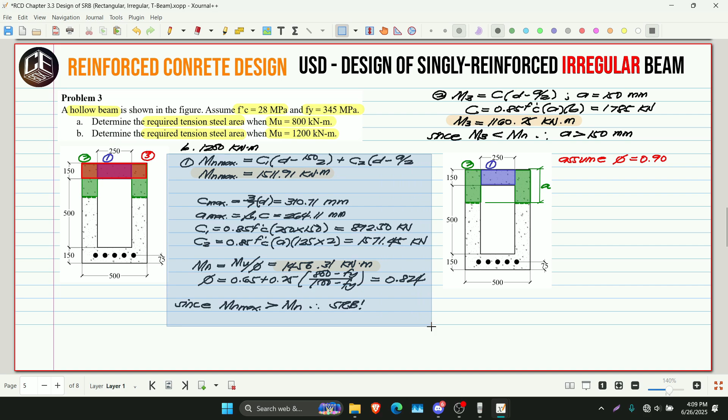So, anong equation natin para sa MU? Ang ating MU is equivalent to phi. Then, multiplied by C1. Ito yung area 1 natin, no? So, C1, then multiplied by, ano yung kanyang moment arm? D minus 150 divided by 2. Yes, divided by 2. Then, plus C2, multiplied by D minus A over 2.

So, ano bang equation ng C1? 0.85 F prime C multiplied by A multiplied by 250. So, ito, familiar na sa inyo to. Ito yun, di ba? Ito, 892.50. Then, ang atin namang C2 is equivalent to 0.85 F prime C multiplied by A. Ito yung A. Then, multiplied by 125.

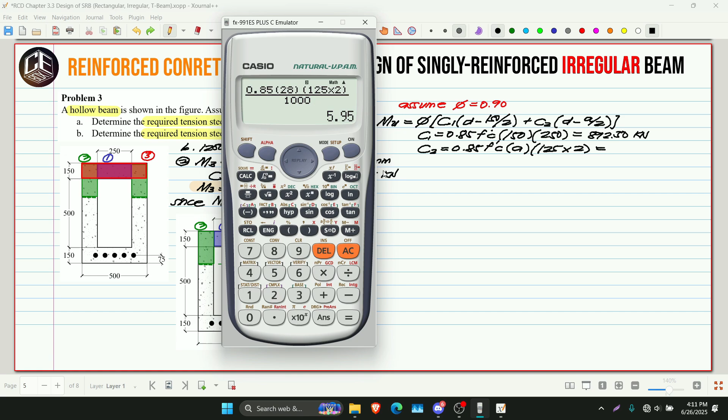Sorry, hindi to A, no? Sorry, this is 150 pala. Ayan. So, this is 150. So, this is 125 multiplied by 2, kasi dalawang area. So, simplify na lang natin. So, 0.85 times F prime C multiplied by 125 times 2. Then, divided by 1,000. 5.95 multiplied by A.

Okay. So, ngayon, yung ating MU, i-divide natin ng 0.90. So, 1200 divided by 0.90. 1333.33. Then, times 10 raised to 6 is equivalent to, okay, C1, 892.50. Dapat, times 10 raised to 3, no? Kailangan natin i-convert ulit ng Newton. Kasi ito, Newton millimeters, no?

Then, multiplied by D minus 150 divided by 2. Actually, pwede natin itong i-transpose, no? Para ibawas natin. Sige, yun na lang gawin natin para mas madali. So, 1333.33. Yan, ito siya. Then, minus C1, 892.50. Wait lang, ano ba yung 1200? Kilonewton meter. 892.5 kilonewton meter din siya, no?

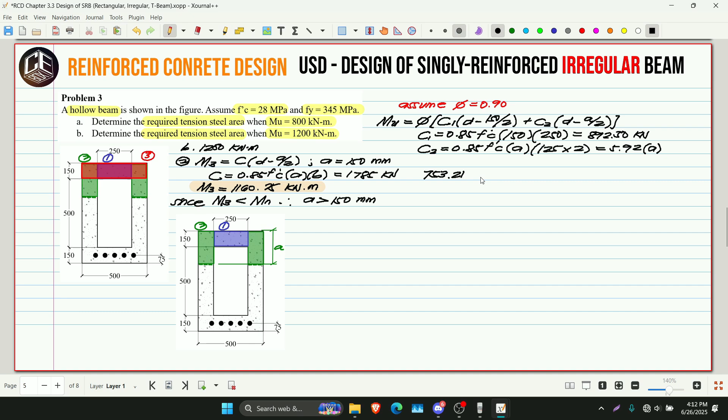Then, multiplied by D. 725 minus 150 divided by 2. Yes, divide pa ito ng 1,000 kasi naka-millimeters itong 725. Ayan. So, this is 753.21. Ayun. So, mas naging mas na-simplify siya. So, 753.21 times 10 raised to 6 para maging Newton millimeters. Then, multiplied by C2. Ang C2 natin ay 5.92. Tapos, i-multiply natin ng 10 raised to 3.

Yan. Then, multiplied by D minus A over 2. So, makukuha natin yung A. 753.21 times 10 raised to 6 is equivalent to 5.92 times 10 raised to 3 multiplied by A multiplied by 725 minus A over 2. So, ilapit na lang natin yung A natin. Mga siguro 150. Ayan. 204.27 millimeters. So, dito, i-solve natin ang C para ma-solve natin ang Fs.

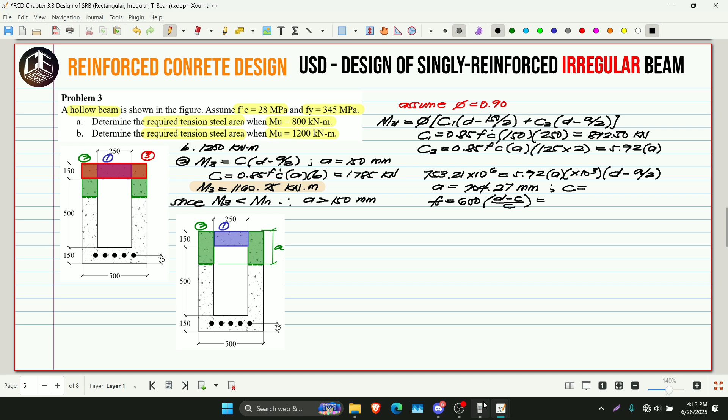Ang C natin is A divided by beta 1. So, 0.85. So, 240.31 millimeters. So, 1210.16 megapascal. Yun yung ating Fs. Now, nag-greater than tayo sa Fy. So, therefore, steel yields. So, mamaya, sa pag-solve natin ng AS, ang gagamitin natin is Fy.

Ngayon, yung Fs natin ay nag-greater than sa 1,000 megapascal. So, therefore, tension controlled yung ating beam. So, kung tension controlled yan, ibig sabihin, tama lang na yung ating phi is equivalent to 0.90. So, kung tama ang 0.90, tama rin yung mga na-solve natin na A and C. So, ngayon, by equilibrium na lang, C is equivalent to T. So, this is 0.85 F prime C multiplied by A multiplied by, hindi pala siya ganyan, no? Kasi, ganito nga pala yung area natin na under sa compression fiber.

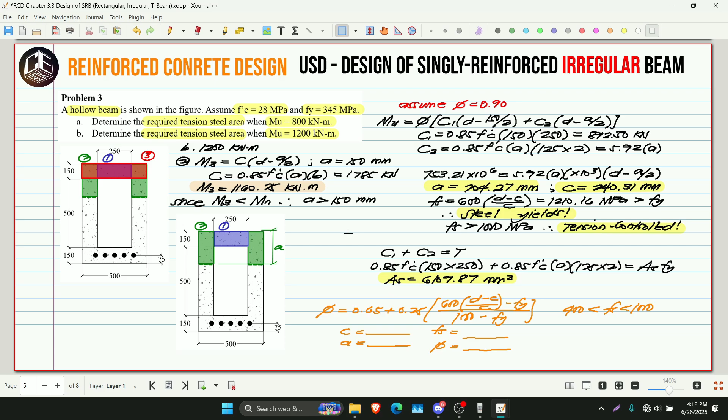Okay? So, that is our problem number 3 for the design of singly reinforced irregular beam. So, that's our example problem.